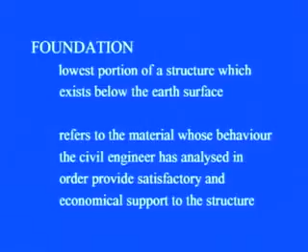Now, these foundations may be classified as different types of foundations, and these foundations, as we know, are below the earth surface, so they are out of sight. Although out of sight, the foundation is nonetheless important, because if it is deficient in design or construction, the entire building or the superstructure is at risk.

You can take the Leaning Tower of Pisa, Italy as a classical example for this. You must have heard that this Leaning Tower of Pisa was leaning towards one side. Now, it has been replaced or erected to its vertical position very recently, in 2001.

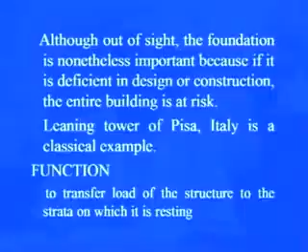Now, the function of the foundation is to transfer the load of the structure to the strata on which it is resting, and mostly it is the geological strata that consists of either soil or rock. Now, in order to design, there are certain important considerations.

One of the important considerations is the stability against shear failure. When we say shear failure, we mean that the shear stresses which are there in the soil below the foundation are within permissible limits. So they are related to the shear strength of the soil.

Another important criteria is that the foundation must not settle beyond tolerable limits that could damage the structure. For different types of structures and different types of soils, there are various permissible limits suggested by Indian Standard Code, and these limits are based on the performance of the structure.

If a structure settles by more than a permissible value, it may impair the functioning of the structure. Like in the case of buildings, if the building foundation is resting on clay, and if the settlement of the structure is more than 75 millimeter or maybe 100 millimeter, as prescribed by different IS codes, there may be a possibility of cracks appearing in the superstructure, and likewise there may be other inconveniences to the structure. So this must not settle beyond a tolerable limit, and all these limits are given in different IS codes.

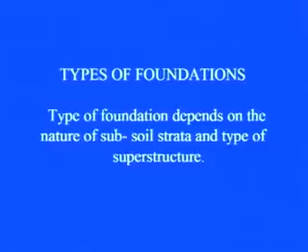Broadly, we classify these foundations either as shallow foundations or deep foundations. In shallow foundations, it is an arrangement where structural loads are carried by soil or rock directly under the structure. In most cases, the depth to width ratio is kept less than 1, and this is defined by various researchers, especially Terzaghi, who gave the criteria that if depth of the foundation to the width of the foundation is less than or equal to 1, it will be treated as a shallow foundation.

Now, in case of shallow foundation, there are many other types, some of them like spread footings and mat foundation or raft foundation. Spread footings, strip footings, continuous footings, rectangular footings, combined footings - all these come in the category of shallow foundations as long as this depth to width ratio is less than 1.

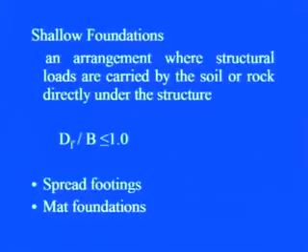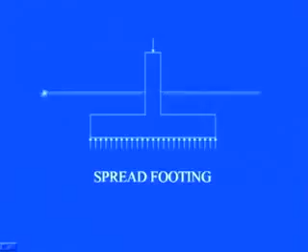In the case of mat foundation or raft foundation, when the area of the column footing or spread footing is more than or equal to the loaded area, we go for the mat or raft foundation. This is a combined foundation for many columns, and the load acted by these columns is taken up by the soil below the mat foundation.

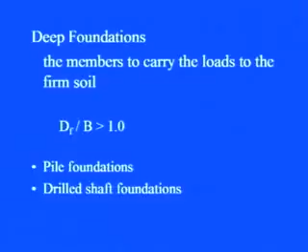Another category is deep foundations. We define deep foundations as members which carry loads to the firm soil, where the depth of the foundation to the width of foundation is greater than 1. Pile foundations, drilled shaft foundations, well foundations, and foundations for bridge piers fall in the category of deep foundations.

In the case of shallow foundations, the complete load is resisted by the end bearing, whereas in the case of pile foundations it is resisted by end bearing as well as the friction between the soil and the member.

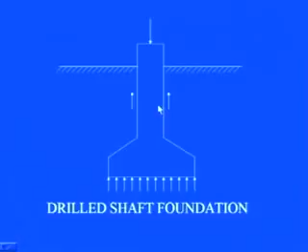Another example is the drilled shaft foundation, used for bridge piers and other structures. An important criteria is that the foundation must not fail in shear - this is the criteria for stability against shear failure.

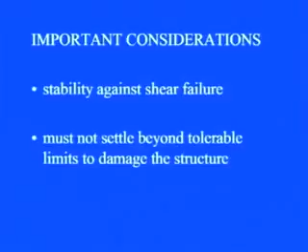It has been found that the factor of safety in shallow foundations is always kept such that the foundation does not fail in shear. Mostly the failure takes place due to excessive settlement, especially differential settlement. We must keep differential settlement within permissible limits, because it is more dangerous to the stability of the structure.

In order to find out the bearing capacity or load carrying capacity of the foundation from shear failure criteria - which we call the ultimate bearing capacity of foundation - there are many theories given by various researchers.

For that, let us take an example of a foundation resting on soil. The load acting on the foundation has load intensity Q, and the width of the foundation is B.

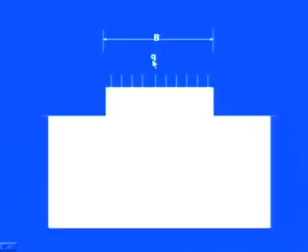When we apply the load and keep on increasing it, there is settlement of this foundation due to compression of the soil strata below. Now, as you increase the load per unit area - that is the pressure exerted by the foundation...

You will get a load intensity-settlement response like this. On this axis, load per unit area is plotted, and here the settlement of the foundation is plotted.

You will find that with increase in load there is increase in settlement, and a condition is reached beyond which there is no increase in load, but there is a sudden drop in stress taken. This type of failure we call the general shear type of failure.

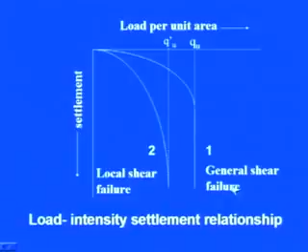In another case, there is no clear cut failure, but the stress keeps on increasing with no clear cut failure point, and the settlement and corresponding strains become very excessive. We classify these two as the general shear failure and the local shear failure cases.

So these failures: one is general shear failure, the other is local shear failure, and the third category, intermediate between local shear failure and general shear failure, is the punching shear failure.

In the case of general shear failure, the situation is like this: you have this soil mass, and resting on it is a foundation of width B, with ultimate load or bearing capacity of the soil Qu. The original ground surface is shown here. With increase in load there is settlement of the structure, and you will find three clear cut zones formed below the foundation.

This zone we call the elastic zone, and zones 2 and 3 are called the plastic zones. There is clear cut development of these plastic zones, and you will find an upheaval type, bulging type of surface on the ground surface.

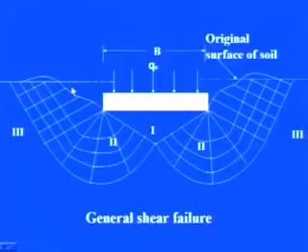This is the case of general shear failure. A triangular wedge shaped zone of soil marked 1 is pushed into the soil, which in turn presses the zones marked 2 and 3 sideways and then upward. At the ultimate pressure, which we call the ultimate bearing capacity of the soil, it passes into a state of plastic equilibrium and the failure is taken by sliding.

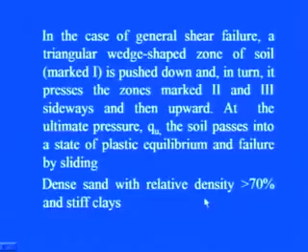Such type of failure occurs in the case of sands and clays which are dense - in the case of dense sand with relative density greater than 70%, and in the case of stiff clays.

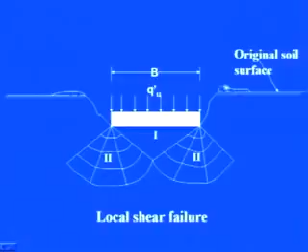Another type of failure is the local shear failure - you will find that these plastic zones are not clearly defined, but they are subdued, and the bulging is very small as compared to general shear failure. In the third type of failure, punching shear failure, there is no development of bulging, and the zones are not clearly defined.

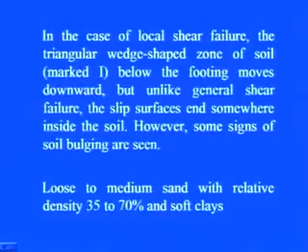In the case of local shear failure, the triangular wedge shaped zone of soil marked 1 below the footing moves downwards, but unlike general shear failure, the slip surface ends somewhere inside the soil. However, some signs of soil bulging are yielded, but are not as pronounced as in general shear failure. Such type of failure occurs in loose to medium sand with relative density 35 to 70%, and in the case of soft clays.

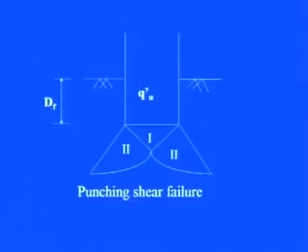The third type of failure, which we call punching shear failure - in punching shear failure the foundation penetrates into the soil without any bulging on the surface. The failure surface never reaches the top surface or the sand surface. This occurs in the case of relatively loose sands with relative density less than 35%.

On the basis of model studies, this is the relationship shown here between relative density of the sand and the relative depth of the foundation in terms of the df by B ratio. You will find that there are different zones showing general shear failure, local shear failure, and punching shear failure.

For example, let us say your depth to width ratio is equal to 1, and corresponding to that, this is the point. Below this it will be local shear failure, and above this it will be general shear failure. That will depend on what is the relative density of the sand, how stiff or how dense the stratum is.

In a nutshell, we can say that in the case of stiff clays and dense sand, normally we get general shear failure, and in the case of loose sand and soft clay, we get local shear failure. On the basis of that, in between we get the intermediate case.

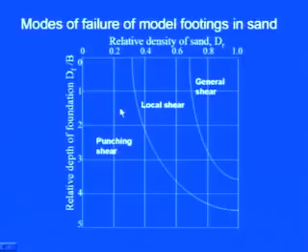These values are also defined such that when we say dense sand, if the angle of shearing resistance of the sand is greater than 36 degrees, you will get general shear failure, and if the angle of shearing resistance of sand is less than 28 degrees, we call it local shear failure, and in between it is the intermediate failure.

There are many equations or theories developed to determine the ultimate bearing capacity of the soil. Here we say ultimate bearing capacity is that pressure which the soil can take up before failure.

The rest of the terms related to ultimate bearing capacity I will discuss in the next lecture, but as far as Terzaghi's ultimate bearing capacity equation is concerned, this Terzaghi equation is based on the Prandtl theory, which was postulated for soft metals.

There are some assumptions made in the case of ultimate bearing capacity given by Terzaghi. The very first assumption is that he considered the case of a strip footing. In a strip footing, the length dimension is far greater than the width of the footing, and when the L by B ratio is greater than 5, we call it a strip footing.

This particular theory has been postulated only for shallow foundations, and we say that when the depth to width ratio is less than or equal to 1, that is the shallow foundation.

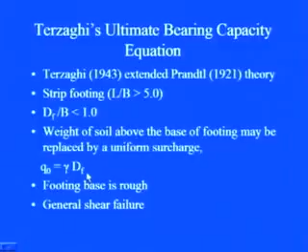The third assumption taken into account is the weight of the soil above the base of the footing, which may be replaced by a uniform surcharge. Now, all foundations are placed at a depth below the ground surface, but here that depth's effect is taken into account only by a surcharge given by Q equal to gamma into dF, where gamma is the unit weight of the soil. This means the resistance offered by the soil above this depth d is not taken into account, and that's why it is called a shallow foundation.

Another assumption is that the footing base is rough. So, when the footing base is rough, there is formation of an elastic wedge below the foundation, and that wedge also penetrates into the soil along with the foundation. So the case of only general shear failure is considered, in which all failure zones are clearly developed, and there is bulging of the soil on the surface of the footing at the level of the foundation.

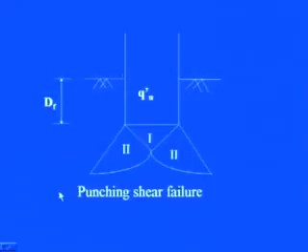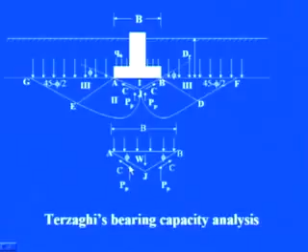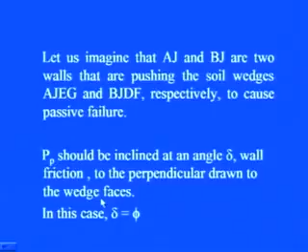So, it is acting in the vertical direction, which will be inclined at delta with the normal to AJ. In this particular case, delta will be equal to phi, where delta is the angle of wall friction. Here these walls are made up of soil, so there is soil to soil contact, and delta will be equal to phi.

Now, as AJ and BJ are inclined at phi to horizontal, PP should be vertical. Now what we will have to do is consider the equilibrium of ABJ wedge per unit length.

Now, when we consider static equilibrium, you will find that we are not considering moment equilibrium, although the errors involved may be very small and can be neglected. But in this particular case it should be remembered that we do not consider moment equilibrium of the wedge.

Now, the force acting downward will be equal to the force acting upward. The downward force will be due to the ultimate bearing capacity of the soil, acting per unit length on the width of the foundation, and the weight vector acting downward, the component of the cohesion acting on the side walls of the wedge in the vertical direction, and then the force due to passive earth pressure acting in the vertical direction.

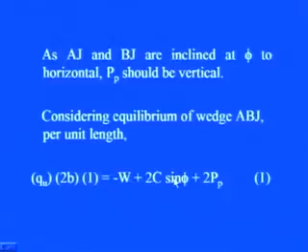Here I have considered B as half of the width, for simplification. So this is equal to QU into 2B, where B is half the width, acting vertically downward, per unit length, multiplied by unity. Here the weight vector is acting vertically downward, with its component in the vertical direction, and there is a vertical component here. So for static equilibrium these vertical forces are equated.

Now, W is the weight of the soil wedge ABJ, which can be determined by the geometry. If B is the width and B is half of the width, then the weight will be equal to the area of the triangle multiplied by 1 multiplied by unit weight, which comes out to be equal to gamma B squared tan phi.

Now, C is the cohesive force acting along each face AJ and BJ. So we will have 2C, since there are 2 faces, equal to the unit cohesion times the length of each face. So the length will come out to be equal to C into B upon cos of phi.

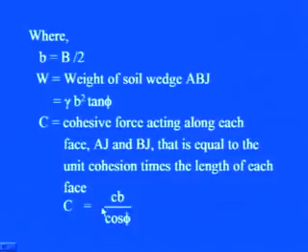So if you substitute these in equation 1, you will find this becomes equal to 2B into Qu, that will be equal to 2PP plus 2BC tan of phi minus gamma B squared tan of phi. Now this can also be written as Qu equal to Pp upon b plus C tan of phi minus gamma B upon 2 tan of phi. This is equation number 3.

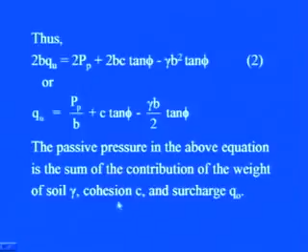Now, the passive pressure in the above equation is the sum of the contribution of the weight of the soil, cohesion, and surcharge. Now what we can do is separate all these 3 by considering only one and then the others by neglecting them, keeping the other 2 as value 0.

Now, in this particular figure, this shows the contribution of the soil weight. Soil weight is because of the unit weight of the soil. Now, here this is the face of the elastic wedge, acting as a wall and pushing here. So there is a passive resistance which is developed here, and that passive force will be dependent on the depth of this particular point J below the ground surface, and the pressure distribution will be triangular.

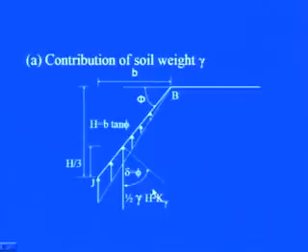So here, if H is the height, H will be given by B into tan of phi, where B is half of the width, and this will be acting at a height equal to H by 3. We have already seen that this particular force will be acting at an angle phi or delta with the normal to this particular plane JB. So here the pressure distribution is triangular, the inclination of the wedge is phi, and here this will also be equal to phi, given by half gamma H squared into K gamma, where K gamma is the passive earth pressure coefficient which can be determined by Rankine theory. Similar to this, is the contribution of the cohesion.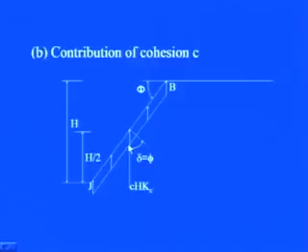Now, cohesion will be considered uniform all along this side, that is JB, and hence the contribution will be given by C into H into Kc, acting at a height H by 2, whereas in the earlier slide it was acting at H by 3. You can find this out from the Rankine earth pressure theory.

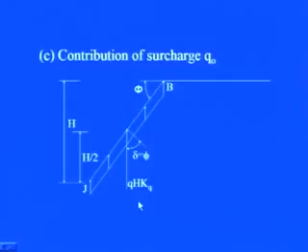Similar is the contribution of surcharge Q0, that is gamma into Df. This surcharge pressure distribution is uniform throughout the height of the wall, and it acts at a height of H by 2, with magnitude equal to Q into H into KQ, where KQ is the coefficient due to this surcharge.

Thus we can write equation number 4 as Pp equal to 0.5 gamma B tan square phi K gamma plus C B tan phi square K C plus Q0 B tan of phi K Q, where K gamma, K C, K Q are the earth pressure coefficients, functions of the angle of shearing resistance of the soil. When you combine equations 3 and 4, we obtain Qu equal to C nC plus Q0 nQ plus 0.5 gamma B n gamma.

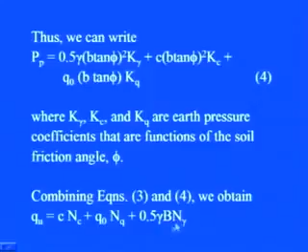Now, nC, nQ and n gamma are the bearing capacity factors, functions of the strength parameter phi, where nC is given by tan phi KC plus 1, nQ is given by KQ tan phi, and n gamma is given by 0.5 tan phi K gamma tan phi minus 1. The terms nC, nQ, n gamma are respectively the contributions of cohesion, surcharge and unit weight of soil to the ultimate bearing capacity.

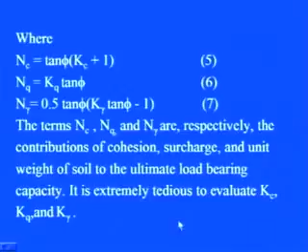It is extremely tedious to determine the values Kc, Kq and K gamma. So what Terzaghi has done is give the following equation factors on the basis of semi-empirical theories he developed, given by equations like nq equal to...

a square upon 2 cos square 45 plus phi by 2, where a is equal to e to the eta tan of phi, eta is given by 3 by 4 pi minus phi by 2, and nc is equal to nq minus 1 into cot of phi, and n gamma equal to half tan of phi k gamma upon cos square phi minus 1.

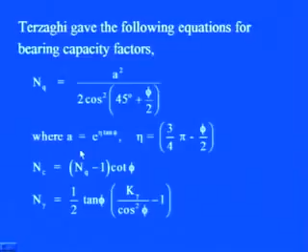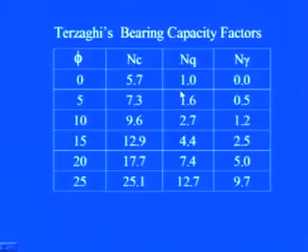Depending upon the angle of shearing resistance, which we can find from different tests, we can pick different values of nc, nq, n gamma and substitute into the Terzaghi bearing capacity equation. We will then find the ultimate bearing capacity of the soil.

Now, Terzaghi actually used an approximate method to determine ultimate bearing capacity Qu. The principle of approximation follows: if C equal to 0 and surcharge equal to 0, that is depth equal to 0, we will have Qu equal to Q gamma, the component of only the weight.

Similarly, when gamma equal to 0, meaning we assume the soil to be weightless, and Q equal to 0, then Qu equal to Qc, the component of only the cohesion. Similarly, when gamma equal to 0 and C equal to 0, we have Qu given by Q Nq, the component due to only the surcharge.

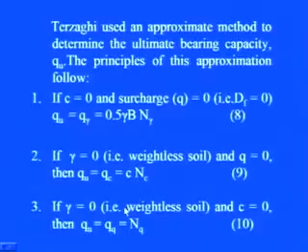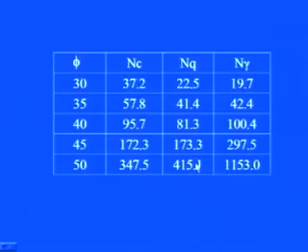Then by the method of superposition, when the effects of unit weight of soil, cohesion and surcharge are all considered together, we are left with the equation Qu equal to Qc plus Qq plus Q gamma, given by C nc plus Q nq plus 0.5 gamma b n gamma, the same equation we derived earlier as the bearing capacity equation.

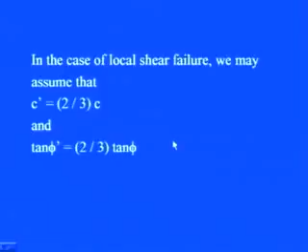Now, in the case of local shear failure, when phi is less than 28 degrees, we take the parameters as C dash equal to 2/3 of C, and tan phi dash equal to 2/3 of tan phi. We determine C dash and phi dash, and corresponding to these we find the appropriate bearing capacity factors, and then determine the ultimate bearing capacity.